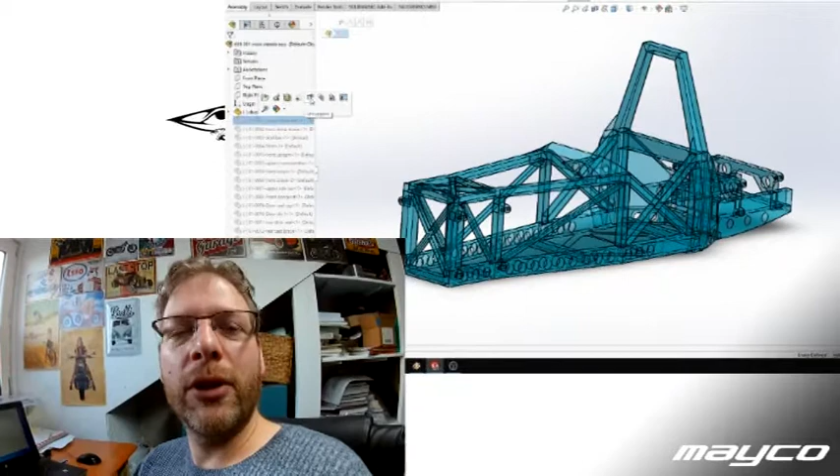Welcome to my video. In this video today we are going to start again on a redesign of the main chassis. And why is that? Well, for those of you who don't know, designing a chassis is extremely difficult. And why is that? Well, first of all, there are several preferences of how you want to design a chassis.

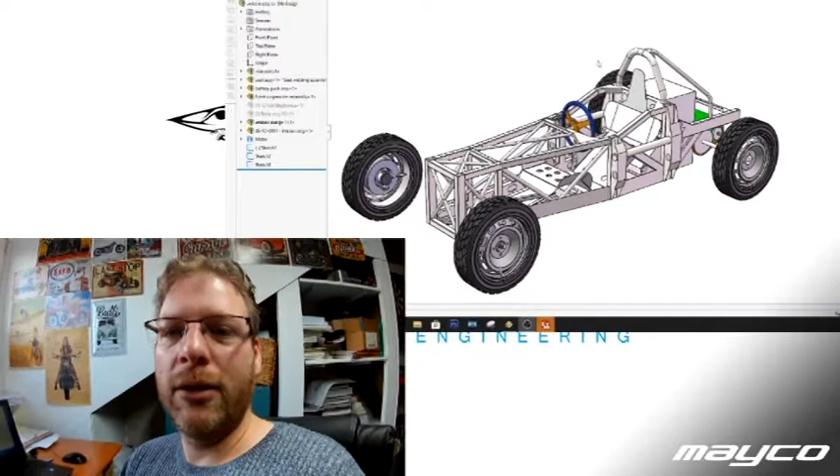Second of all, it has to fit all the major components, so in my case a battery pack, and it depends on the battery supplier that you have, how big a battery you want. It depends on what type of suspension you want to run. It depends on what kind of drivetrain you run, how you want to position your steering rack, etc.

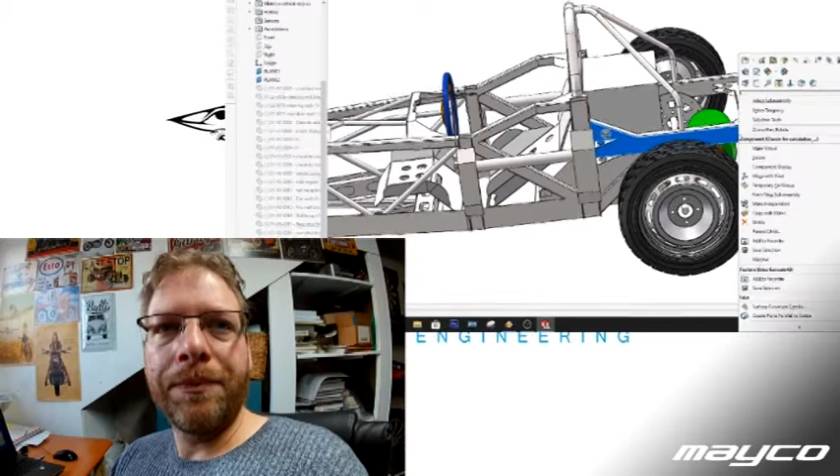Now, for me, the main reasons for wanting to redesign the chassis were basically because the front of the chassis was a little bit on the short side, so I didn't have a lot of crumple zone. That was one reason. Second reason was that at the driver's shoulders the chassis was just too narrow. Another reason was the high bar that I put in to get the shoulders underneath the chassis; I really didn't like that a lot.

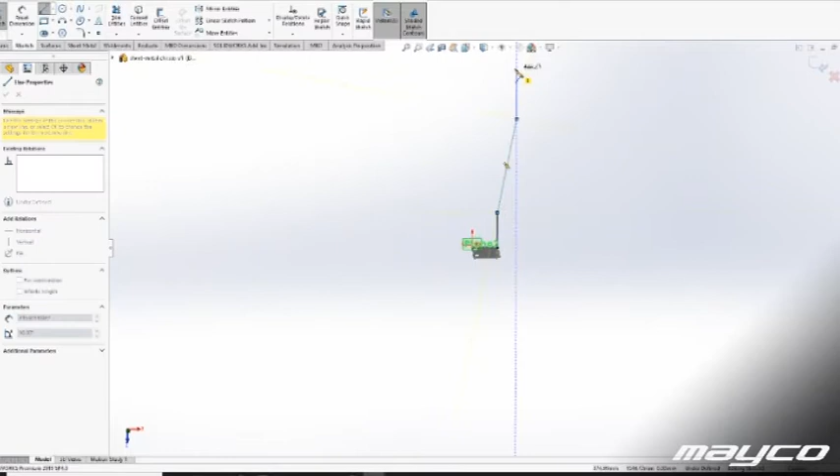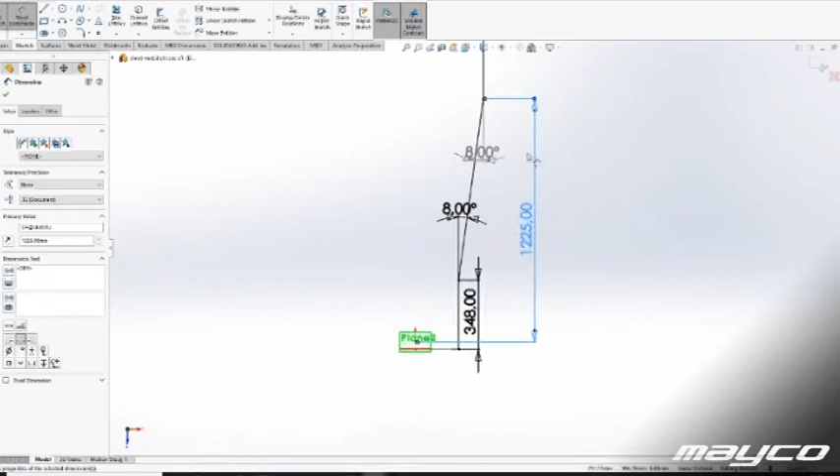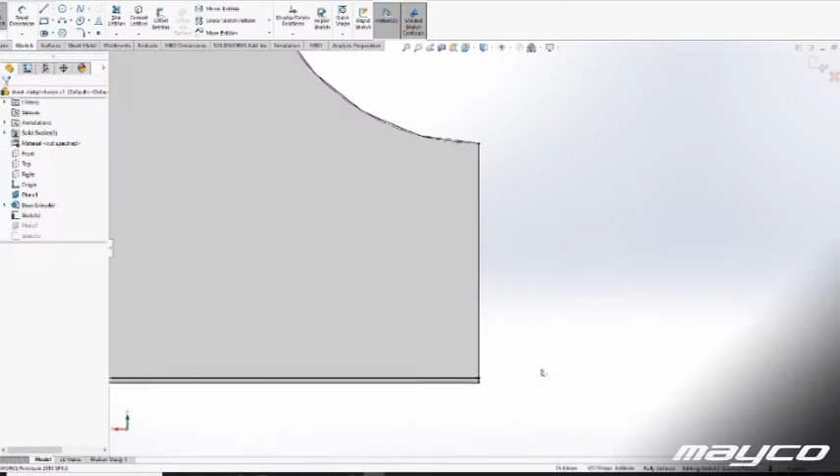The last chassis that I designed was basically a chassis that I could build very cheaply and quite easily at home. Actually, my goal was to design a sheet metal chassis and not a profile chassis. The reason is because sheet metal is way more accurate these days with laser cutting and digital bending. Everything is computerized, so the failure in this chassis is way less, and you can really engineer it with small fingers that click into each other, etc.

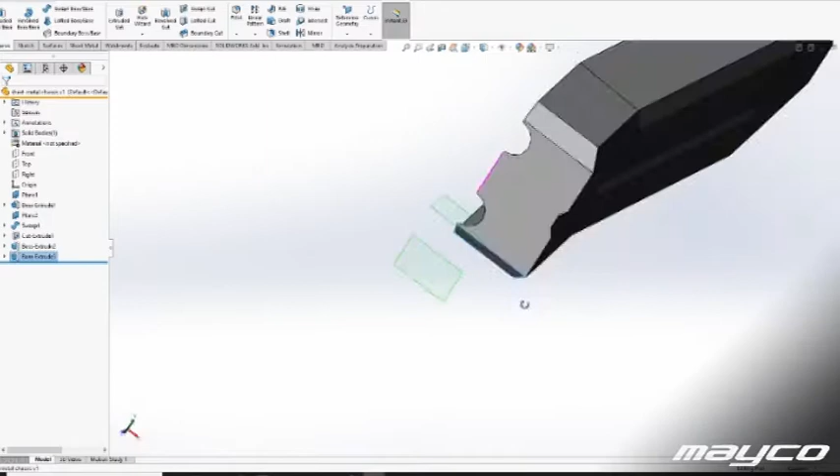And a big benefit of working with sheet metal is that it's much easier to get high strength material. For example, if I want to use Domex, there are no square profiles in Domex, or at least they are very difficult to get. You can get some high strength round tube, which I will be using for the roll hoop, for example. But in the old chassis I had to use, let's call it mild steel. And for something that has to absorb a crash, mild steel is just not the way to go. But it would be cheap and easy to build yourself.

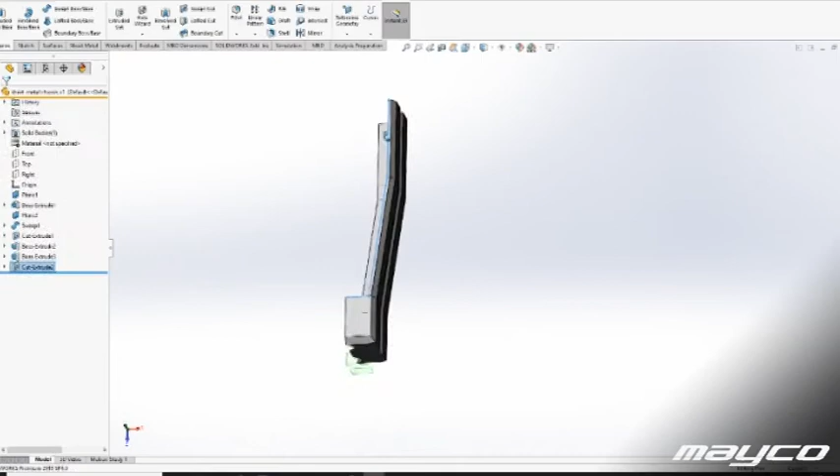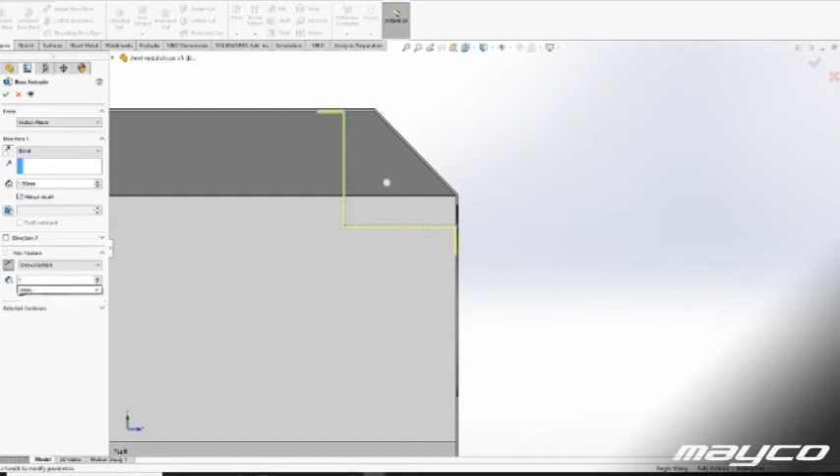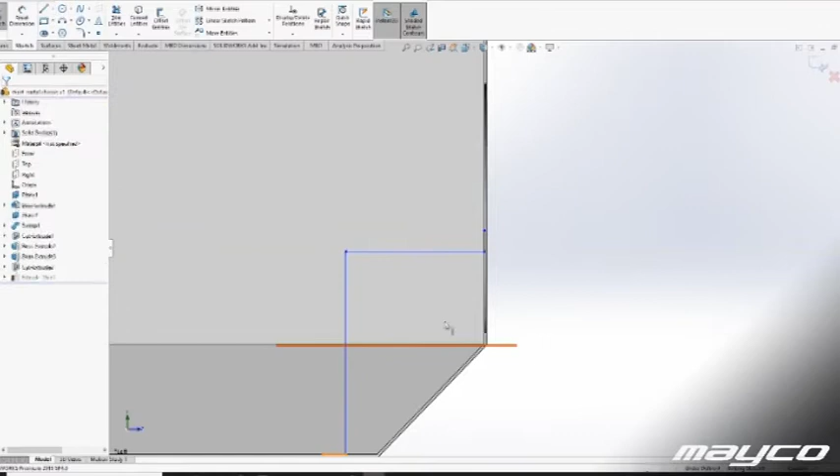Then coming back to wanting to build a sheet metal chassis, I saw some dump trucks and other vehicles that nowadays use what we call strip kanten in Dutch. What it means is that you take a sheet metal plate and put several angles into it, making it into a very rigid shape, and by doing so a thin sheet metal plate becomes a very rigid and strong construction on its own, and therefore you can build extremely light and still very strong.

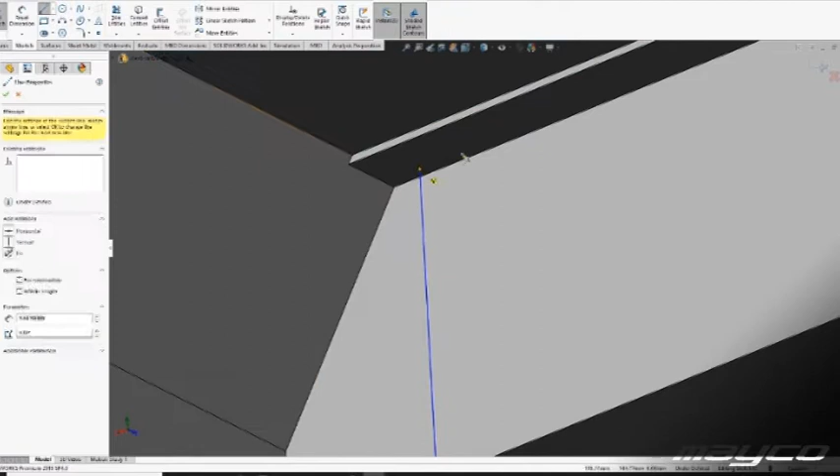For example, at my job we build vacuum tanks. Vacuum is a very high force, and by creating a shape that has several angles in it, we can generate a very strong profile without having to add a lot of gusseting.

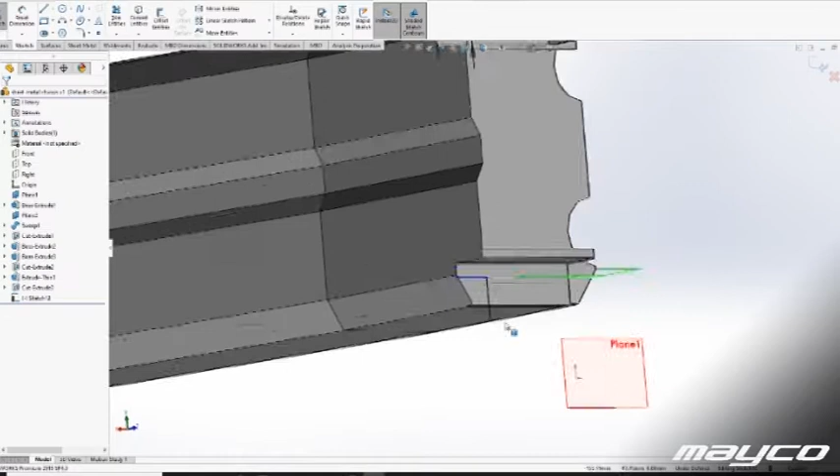So with that idea in mind, I went back and made a redesign of the chassis so that I could use Domex, so that I can use very thin walled plates: 1 mil, 1.5 mil, 2 mil, 2.5 at the thickest. That will help me design a very strong and lightweight chassis that might also be much easier and much more accurate to assemble.

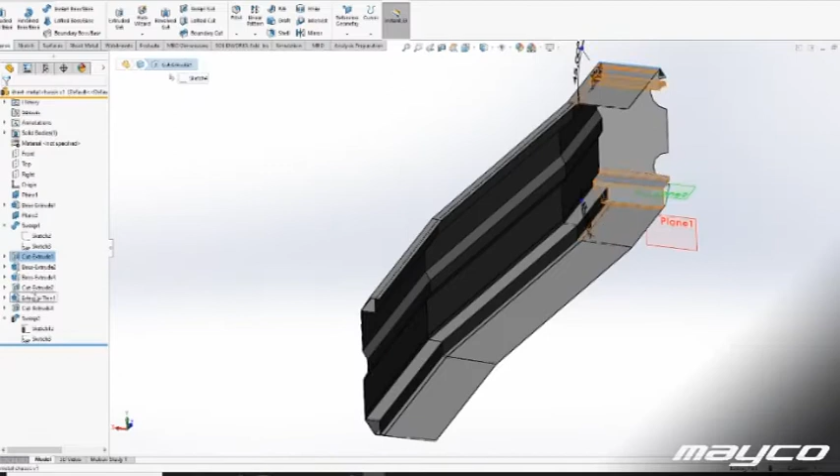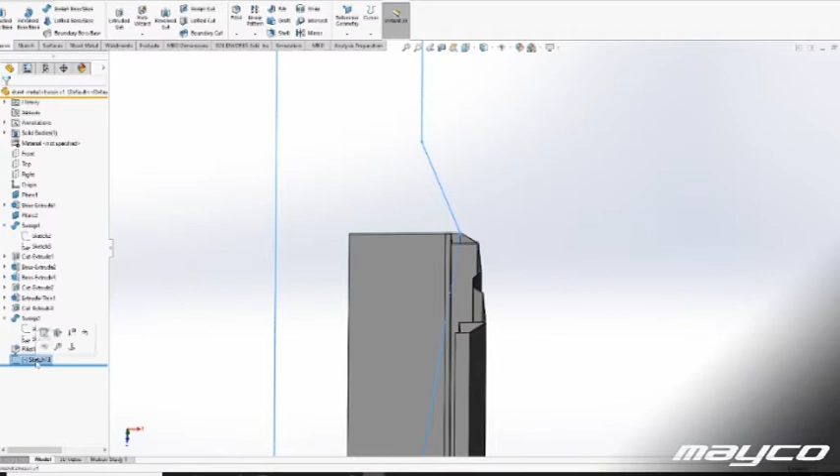Another thing is that now that I know my main components and my layout, I want to use that input to make my chassis much stronger. For example, we have the anti-submarine bulge of the seat, and I want to use that now to be part of the chassis and really help stiffen the chassis.

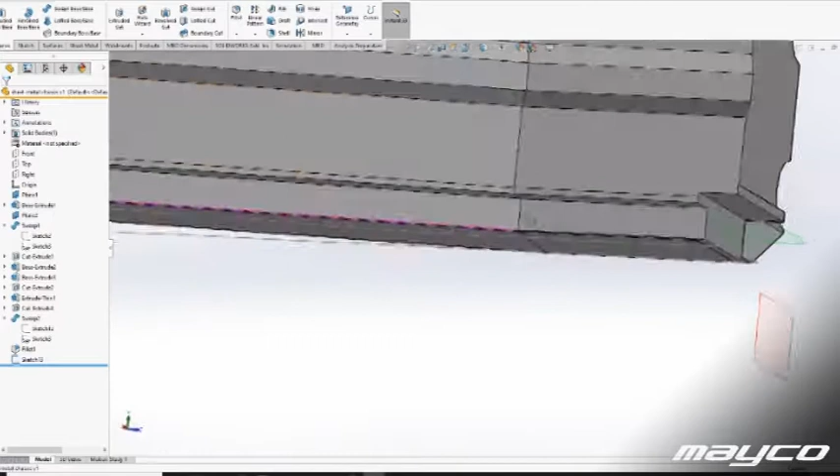So it's a big sheet metal frame basically inside the chassis, and by putting that in, I have basically created a big box section inside a very tiny chassis, and that will help it tremendously with rigidity and flex and that sort of stuff. Now the same happens at the rear.

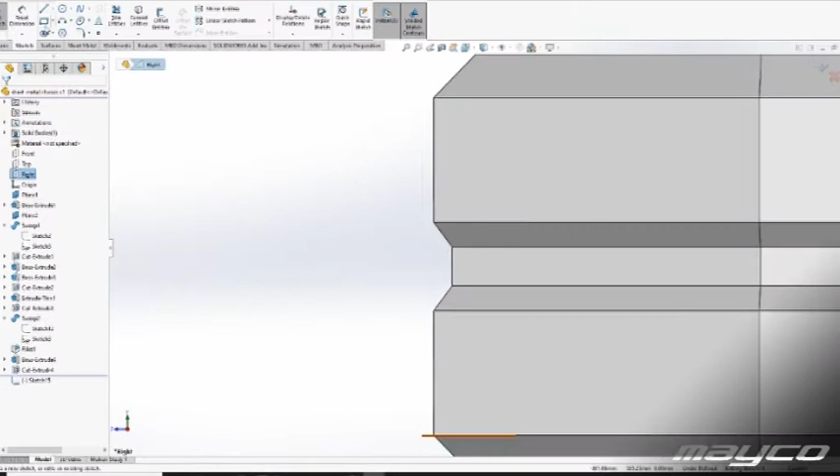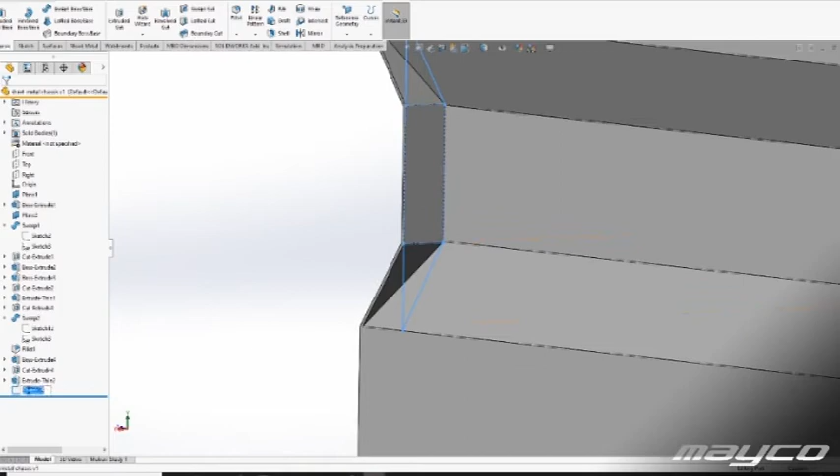I need a box section under the seat, under the back of where you're sitting, because the battery pack has to be there. So I am creating again a very big box section inside the chassis, which helps me stiffen up that chassis tremendously. Another thing that I want to do is have the suspension mounts inboard of the chassis.

I've started with that, and because I'm going to do that, I need to make the front half removable. So when I make the final model of it and I go into production mode basically, I'm gonna design all the sheet metal parts independently. Now I'm making a solid body so I can run FEM calculations on it.

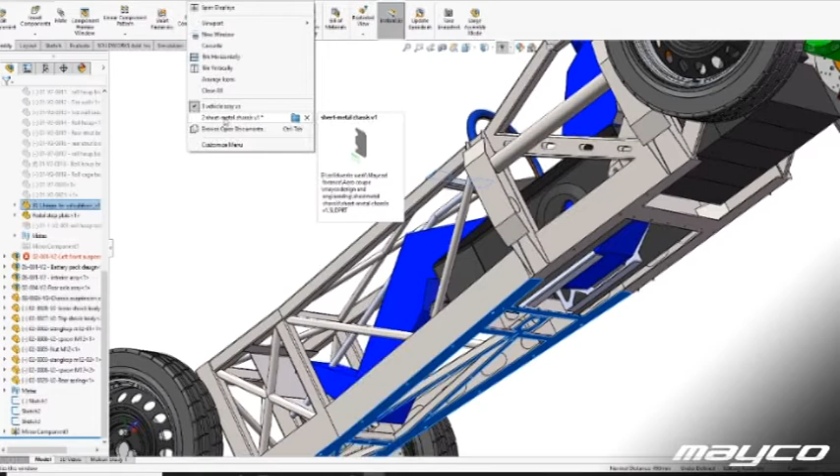But if I'm starting to make this model for production, I will completely redesign the front so that I can easily take it off. So in case you have a small accident and the suspension bends the mounting points, you can just take off the nose cone basically and put on a new nose cone. So that means it has to become a dividing point in the nose and on the chassis.

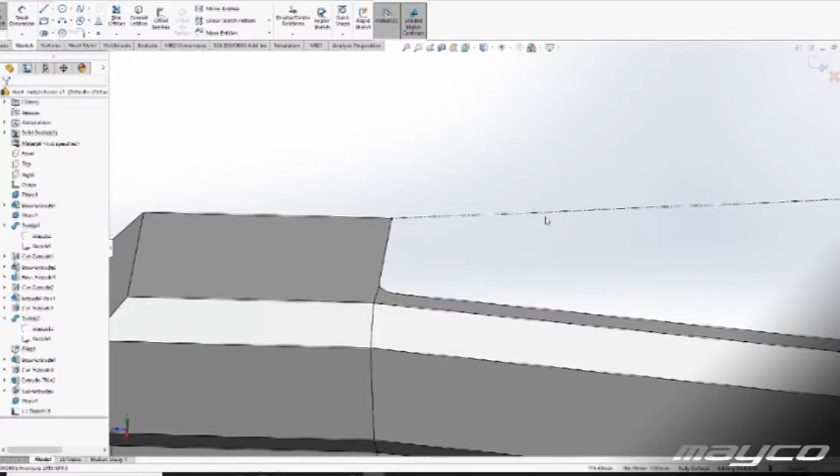That also means that the pedal box needs to transfer, and some other parts like the steering column, etc. So that needs some figuring out. Yeah, so that's a part of it.

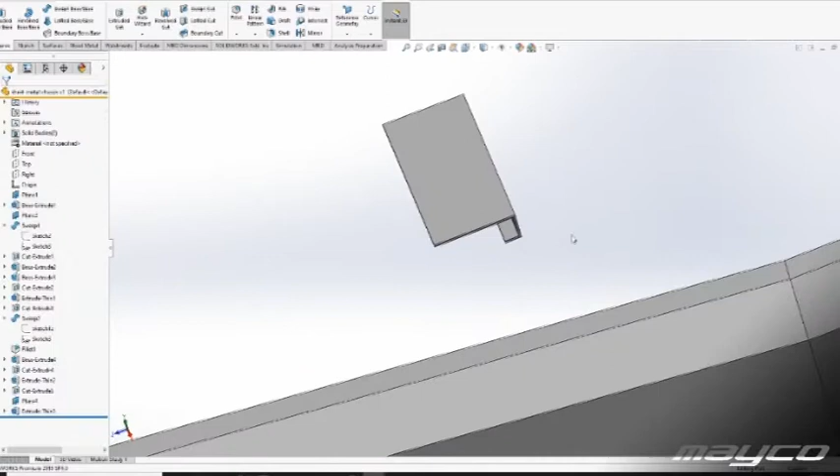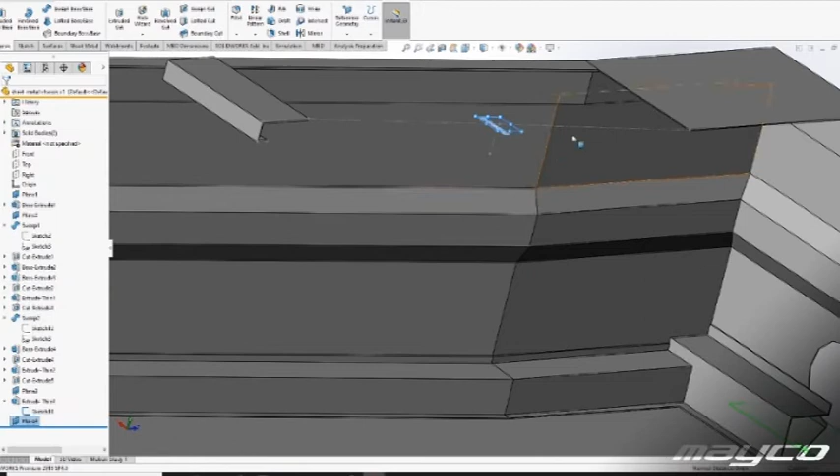Another thing that I want to do is that in the corners I have these chamfered parts at the shoulders, and I'm stretching that so that you can lean with your shoulders against this, and that makes the seat very simple. So the seat will just be a straight plate with some bends in it. On the sides next to your buttocks, your hips and your rib cage will be fiberglass tops, just like I had in the previous design.

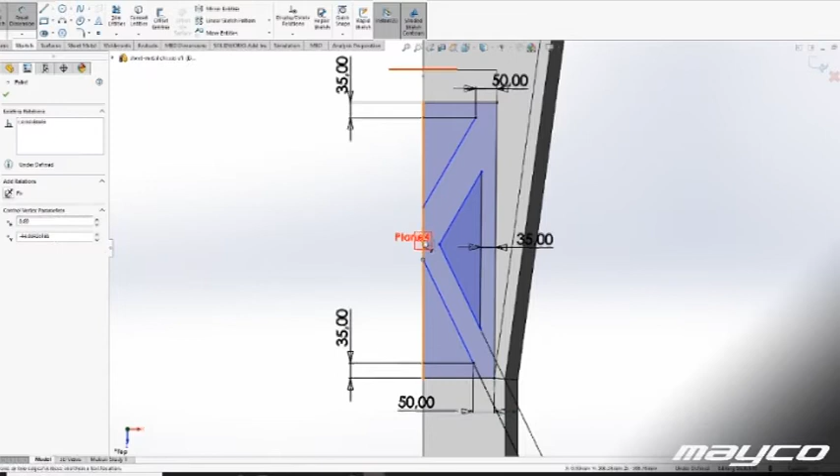But now the seat connects to that big box section for the anti-submarining with a hinge point, so I can just grab the seat and pull it forwards, so I have a little bit of storage under the seat. And just like in the last seat and interior design, I will have a little bit of storage underneath your knees. So you can have a small bag, your wallet, your phone, things like that stored inside the car, which is a major benefit, I think, for a car that is so compact.

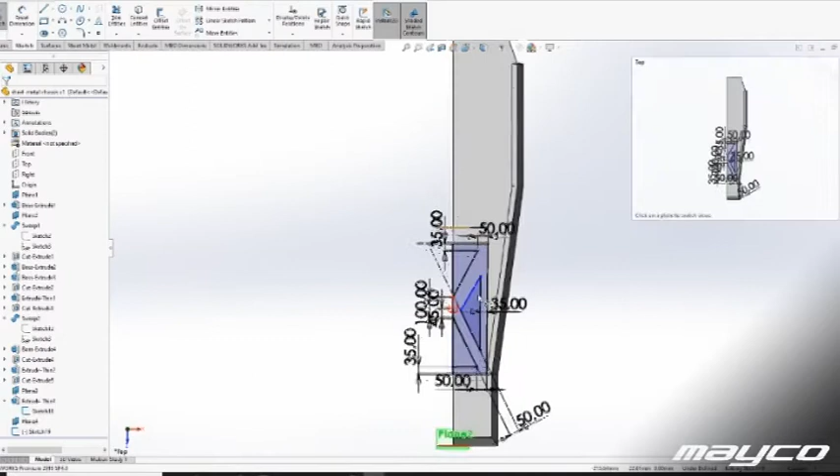Now, the big reason behind it, as I mentioned already, was elbow room, shoulder room. At this point in time, the inside of the chassis was 52 centimeters wide, and your shoulders could tuck underneath the chassis a little bit, but I'm well over 50 centimeters wide in my shoulders, and that's not including elbow room. So what I did now is widen the outside of the chassis to 70 centimeters or 700 mil.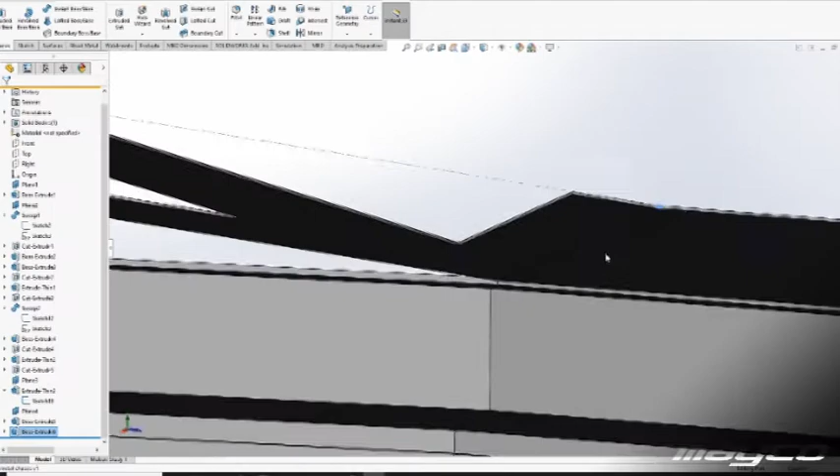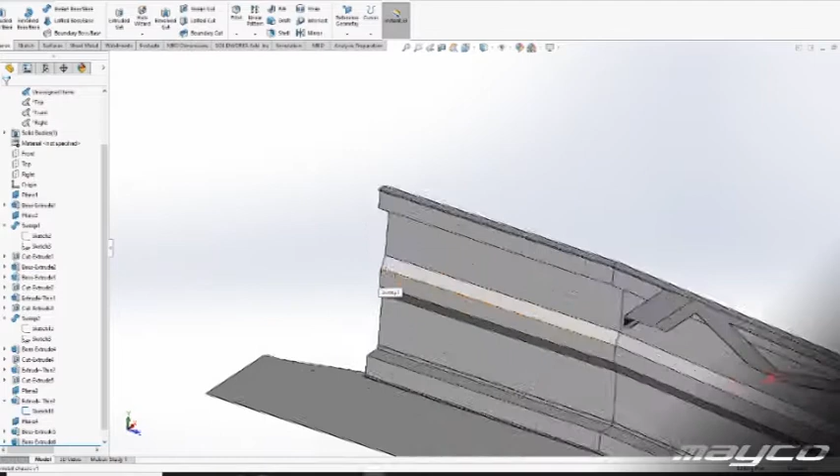And that means that on the inside, I mean, the outer shell of this model is only 1 mil thick, and there is an edge inside the profile that comes in 20 mil. So let's say all in all we have 65 centimeters inner room, which means that we have quite a lot more room. And the reason behind it is steering. When you're steering, you move your arms, so you want to have space for that.

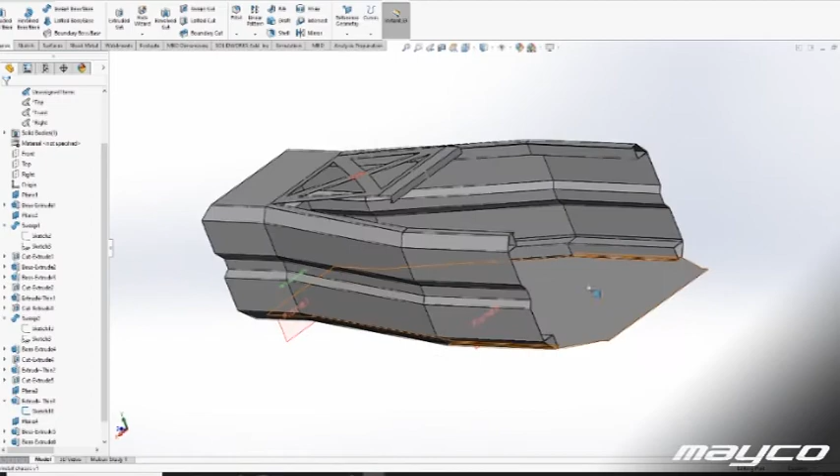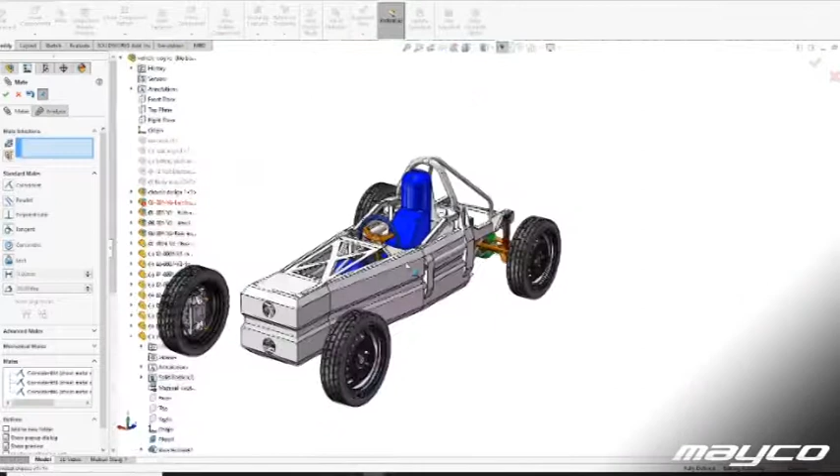And furthermore, I want to have the hydro e-brake, as I mentioned previously, because I want to make a drift car out of it as well. For the steering wheel and the hydro e-brake, you just need space next to the steering wheel and around the steering column, and there was just too little space there. It was so minimal that I really wanted to generate more space in that area. So those are several reasons why I wanted to try and do this.

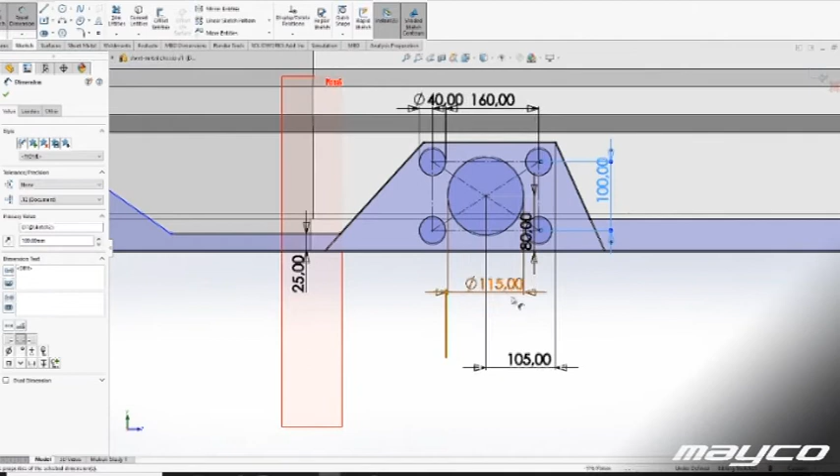Again, this is a trial chassis, and I need to run some FEM calculations on it to see if we can really get it to work the way I want it. And based on that, we can continue.

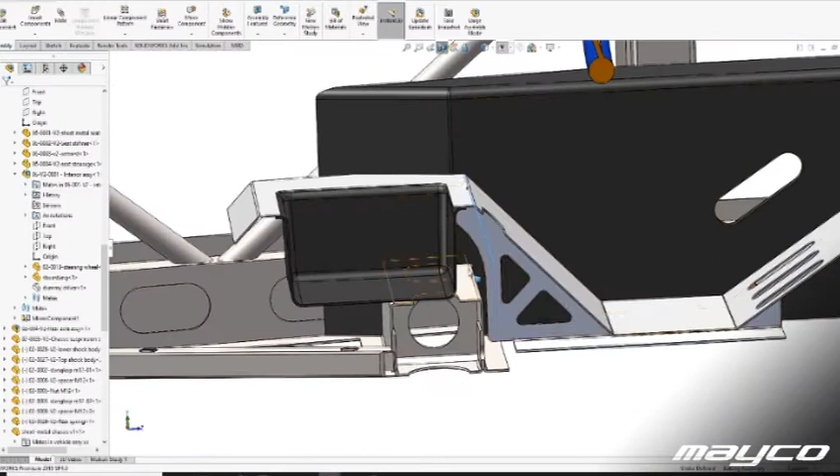Another thing that I find important is that with this new chassis, I can also make the top and the bottom of the chassis chamfered in, and that will also allow me to channel the forces around the bend. When I use angle or normal profiles, I always have a 90-degree angle, and I don't want that per se. Now I have a 45-degree angle, for example, so the force flow will be much more organic around those corners, and it will transfer the forces much better into the bottom of the chassis.

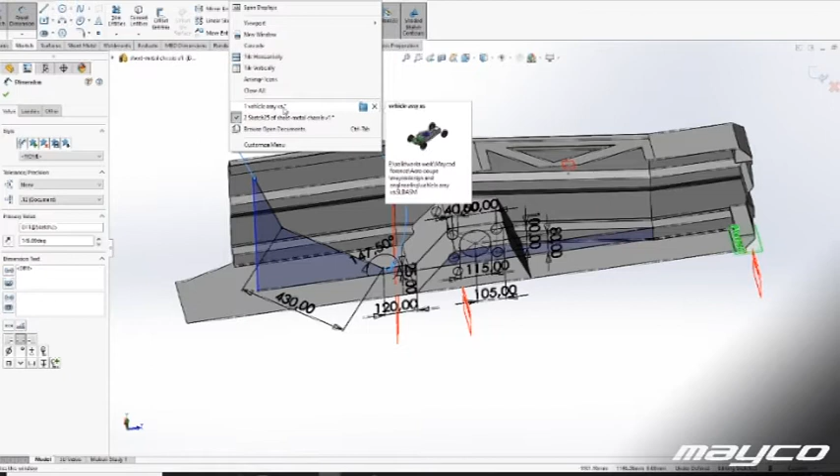So it will just give me much more strength out of the shape, and it will help the forces flow much more through the chassis and the sheet metal. So all in all, I think this design will help me greatly with the strength of the chassis. However, the major difficulty will become assembling this chassis. What I mean by that is that everything now will click together. Everything will work as a team.

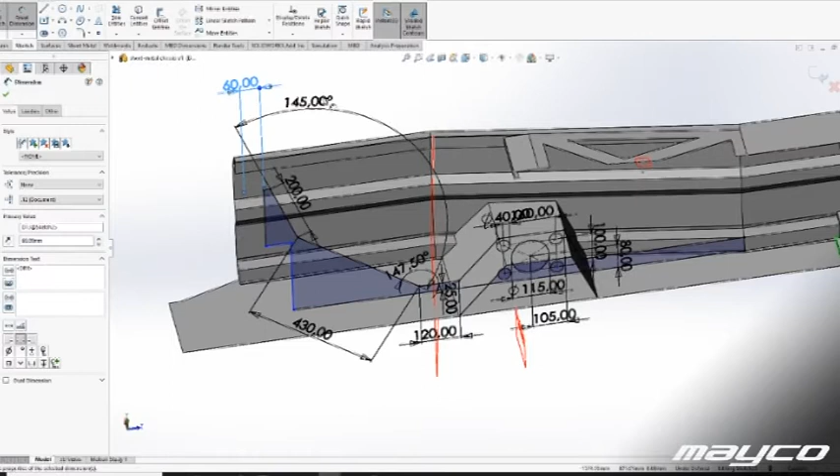And when it's one package, you think, oh, that's clever. However, for example, if I look at the sidewalls and that big anti-submarine box that I discussed earlier, that big anti-submarine box is as wide as the chassis. However, as I just mentioned, the top and the bottom of the chassis chamfer in. So I cannot just drop that big box in. That big box needs to be there, and then the side needs to be mounted against it.

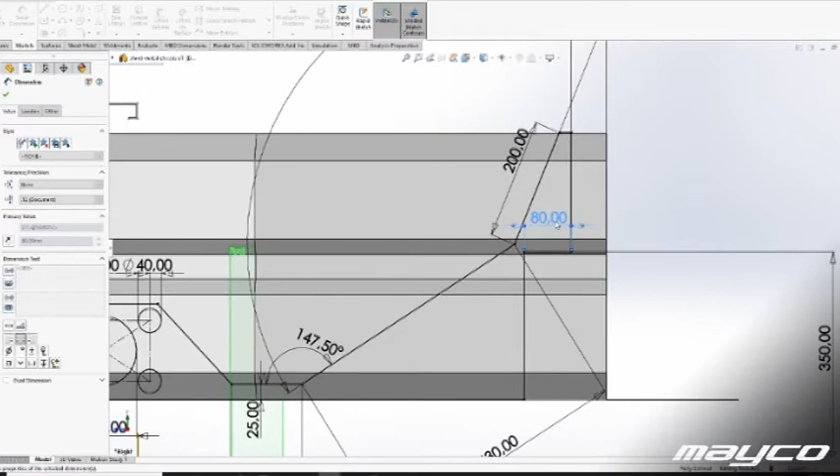And also with those lines, with those breaks in the sheet metal, you're limited to what that sheet metal afterwards can do. So, for example, if I just put a 90-degree bend in it, I can make it quite a long piece. But if I put, let's say, 10 bends in it, some to the inside, some to the outside, then you're becoming limited in other designs to the sheet metal. So we need to figure out where we're going to put the break line and say, okay, this is where we weld or where we bolt or where we glue.

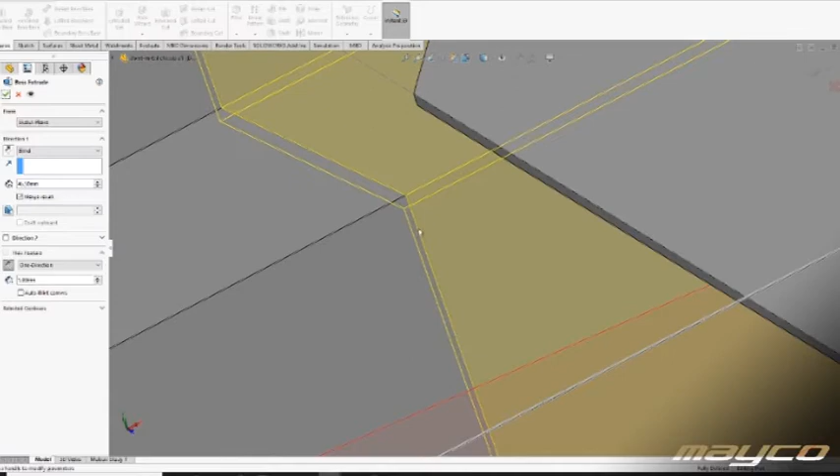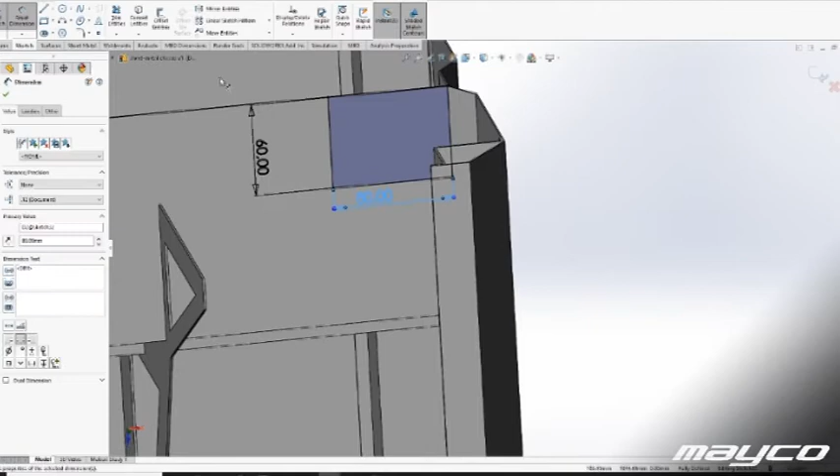A lot of sheet metal chassis, like Lotus for example, they glue their chassis instead of welding or riveting or bolting. And the big thing with gluing is that it remains somewhat flexible, with torsion in the chassis, etc. And also with the heat, if you put the car in the sun, then it can be a good thing to have some flexibility within the sheet metal, and because of that glue, that is possible. So it opens up a lot of doors.

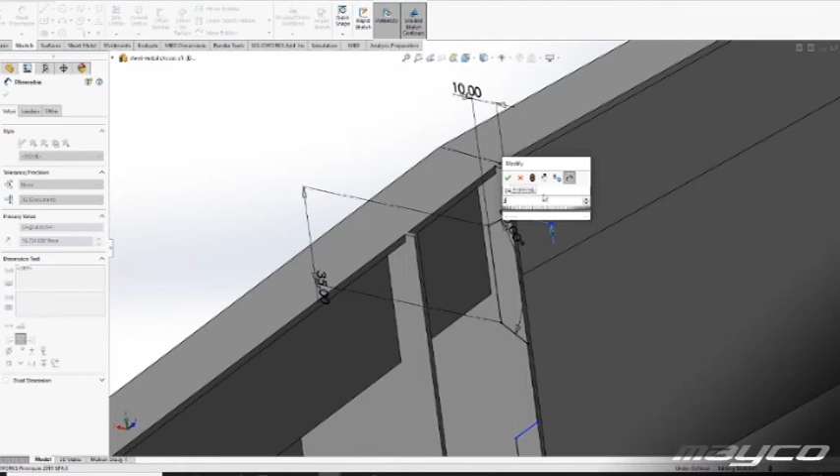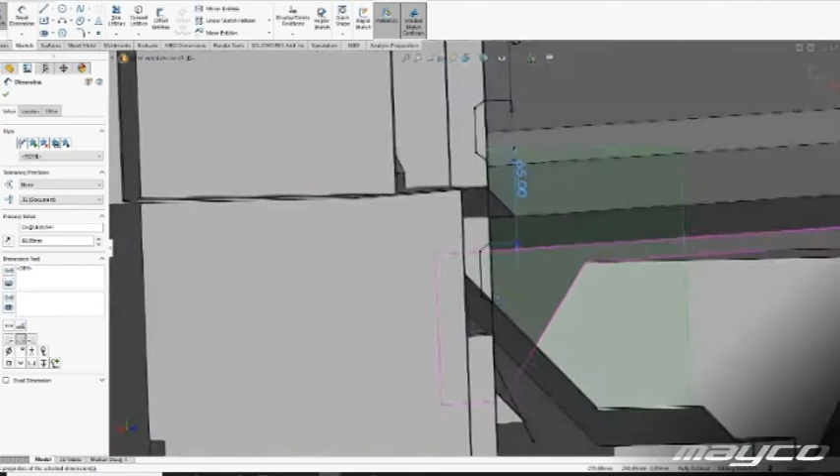Chassis, and basically it all just clicks together then, and with some minor welding points within that chassis, I basically have a cocoon of everything clicking together. So in theory, I wouldn't have to weld a lot. Of course, in reality, you'll weld everything still, but basically to get the basic structure to fit together, we just have to make sure that the most important parts click together and then just fixate the rest of the chassis. And I think that with the design that I'm currently working on, that is very well possible.

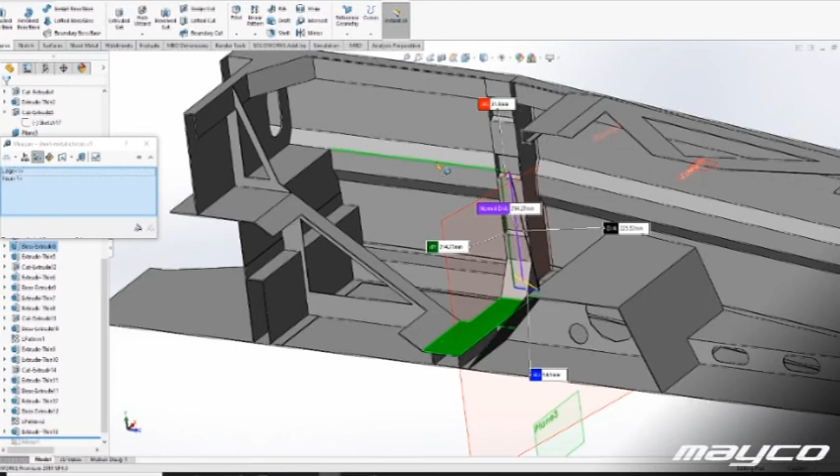So yeah, in the end, I'm very positive of what I'm trying to do here now. And again, we need to calculate this, and the front section will be separate and will be looking a little bit different than what it does now. But I think that the direction that we are going is a good one. And I'm taking all the good things from the previous chassis that I learned, and we're going forward to this chassis, learning even more. And yeah, it's something different.

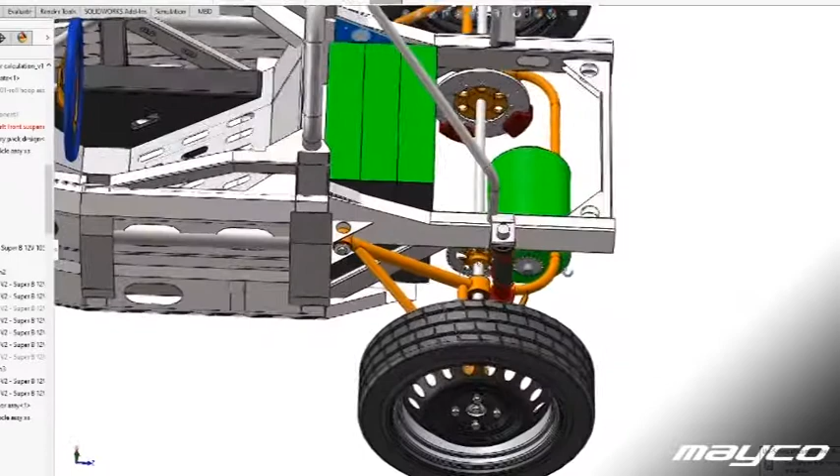I hope that you like this type of video. I myself do like it a lot. I mean, I like to design bodies. As you can see, I designed a lot of different body styles, but it's also to explore this type of chassis build and this type of packaging. And also to show, of course, if I get this thing into production, to show people what kind of body shells you can do with this chassis. And that's what this whole thing is about.

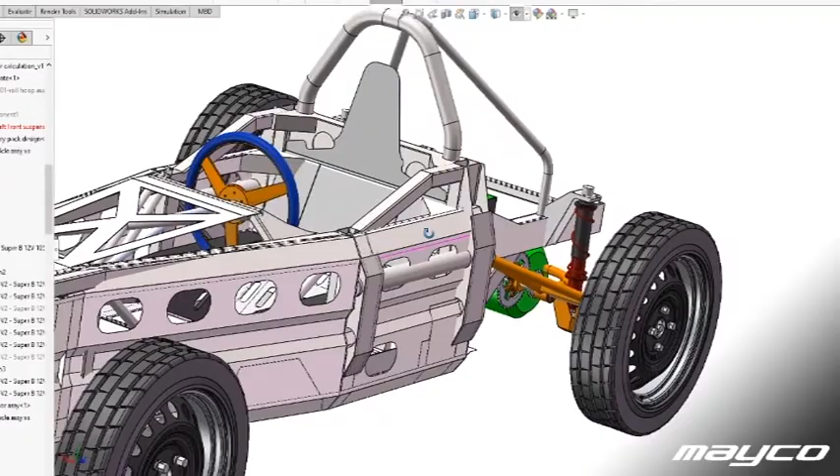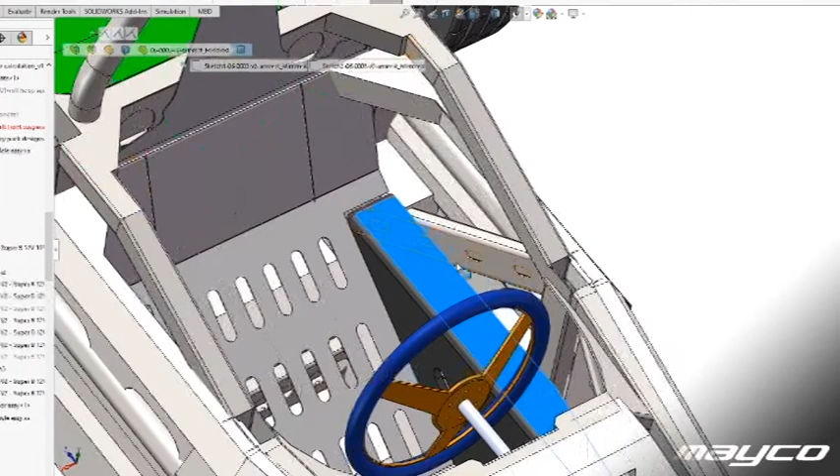It's a skateboard in essence, which means that you have a chassis with the packaging of the components, with the wheels, the suspension, the driveline, etc. And you can choose whatever body style you want to put on top. So by designing body styles, I show that is possible, and I show very different body styles, so you can see what the options are. But in the end, we need to have the packaging, and we need to have that chassis. So that's what I'm trying to work on right now.

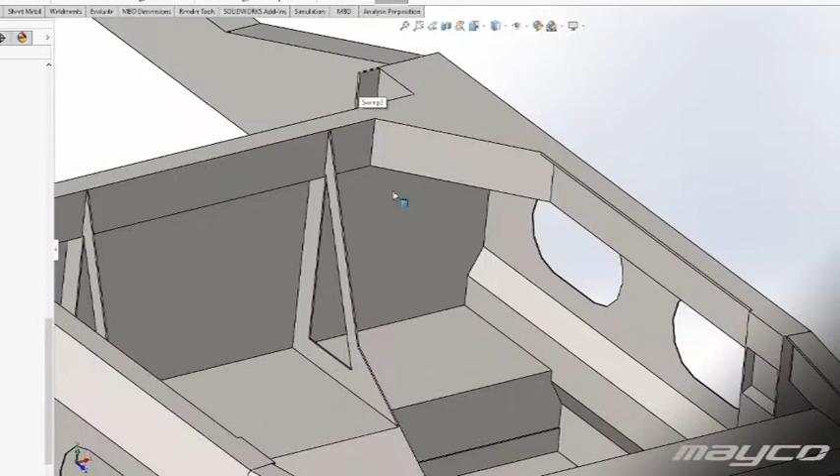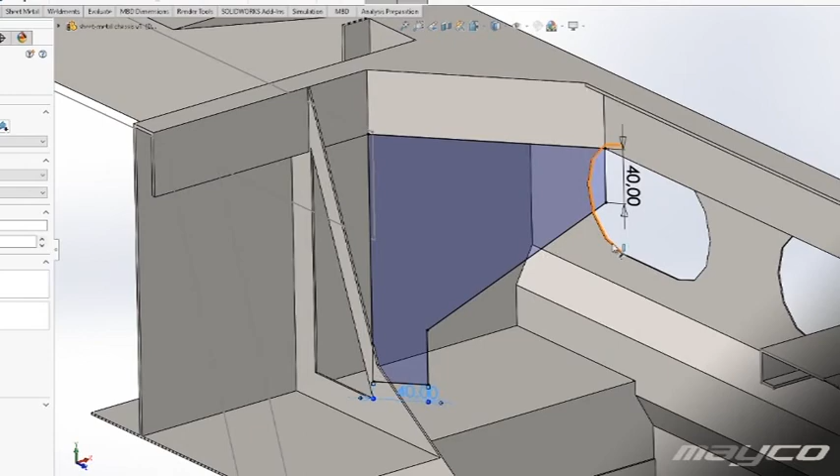You'll see me working on fixating the steering wheel position, that bar that is there. That bar itself will stay there as it is. However, the angled sheet metal plate that is there right now will be completely redesigned. And the reason for that is, if I want to make a boltable front end, I need to have a front section with a big hole somewhere, so that I can put my tooling through. So the first, let's say, 30 centimeters of the main chassis, I need to have that flat and smooth, so that I can put a big hole in it to get in there with tools to bolt up the nose cone to the main chassis.